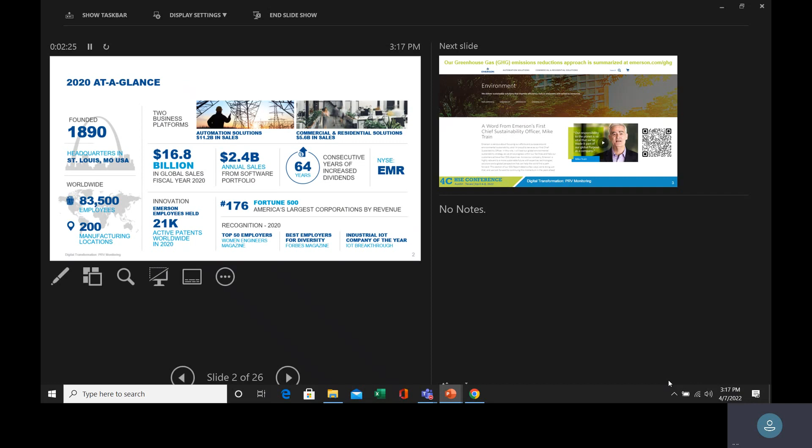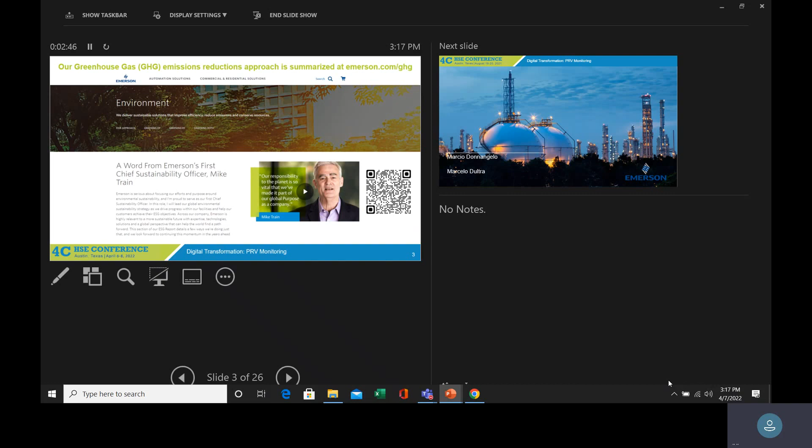And here's also our commitment to sustainability, top down at Emerson. So not just what we can offer to customers, but also what we do inside as well. Check our website with our Sustainability Officer for details on our initiatives.

Okay, so let's talk about the PRV monitoring. We presented this material yesterday. We're going to be a little more specific today on the monitoring part, but I just want to talk about this slide briefly about the affirmative defense.

So basically, when we have an incident, we need to discuss with the regulator how we're going to position our claim. What should I include in my claim or not? What we're seeing here is a copy of the administrative code from Texas - we took Texas just as an example. But when can you invoke the affirmative defense?

So when you have equipment breakdowns that for some reason are so old or obsolete technology, and you don't have the replacement parts, you can claim or use the strategy of affirmative defense - that you could not make a correction because you had parts or equipment that was not available, so it was beyond your control to do that repair.

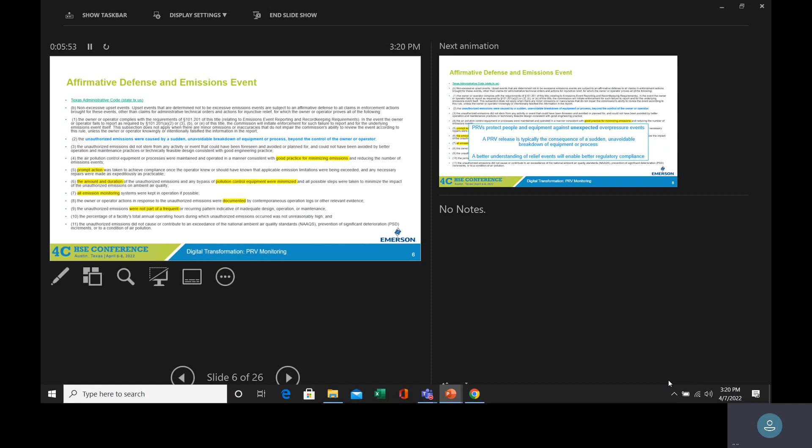So what we're going to cover here is an important portion of that - the PRV. Because if you do your homework with the PRV, you're going to be able to check, mark, and address all of those things, and not make that something going against you when you're claiming the affirmative defense as your strategy to minimize that discussion with the regulator. All right, so with that, I'll let Marcelo continue.

Thank you, Marcio. So I guess the point is, what's the connection between PRV and affirmative defense? And I think the connection is: first, if a PRV goes off, it opens - it's not a problem with the PRV, it's actually a process issue. It's a symptom that your process is overpressure. PRVs are not supposed to open, they're actually designed to stay closed all the time. If they're open, you should investigate - there is a problem there. So by definition it's an unexpected event.

So it clearly checks the box - it's unavoidable, it's an unexpected event, it's beyond control. Something happened there. And what we're trying to say in this presentation is using digital transformation - there's existing technology that you can use today, implement, that you can really build a strong case.

Okay, I know the PRV is not supposed to open, but I'm monitoring when it happens. So it's not the case that the valve opens and stays open and people don't see it, or the valve is leaking and you don't know the valve is leaking. I can monitor that, and you can build a case. There are other things we're going to show around this - it's using existing technology and the benefit of digital transformation to build a stronger case for affirmative defense.

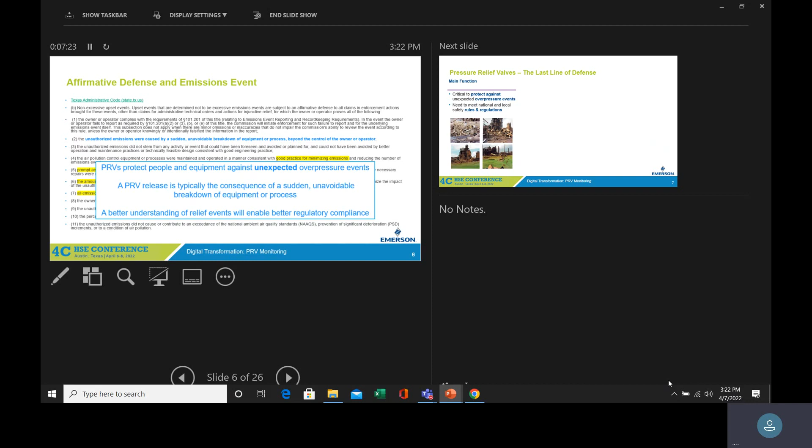That's the context. So going back to PRV 101 school, for those not familiar - they are designed with the purpose, we call it the last line of defense. So when everything fails, if your control system fails, your BPCS, your emergency shutdown system fails, the PRV is going to work. It's going to shut down, you're going to release, you're going to protect against explosion, protect people, equipment. That's the definition of how a PRV should work.

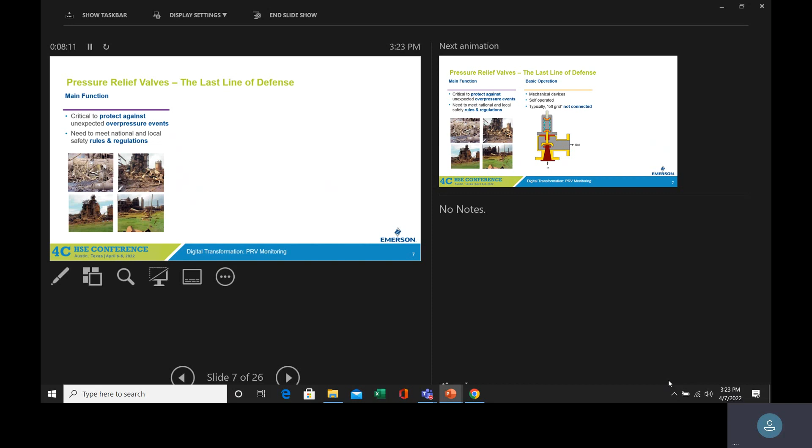And they are designed following a lot of codes and legislation - local, county - and there are insurance companies that play a part too. So it's a safety device. If everything fails, this stuff needs to work. And by definition, it's very highly regulated. It's super simple - you know what a pressure cooker is? That's it, you know the stuff that goes off - that's a pressure relief valve. And the compromise is safety against what?

Waste. When you release, you're throwing things out - energy that you do not need, just throwing it out. Product that you're throwing out, product energy and efficiency, when you open a pressure relief valve, you're compromising. Keep that in mind.

That's very important, and it's a simple device, super simple. So if the force resulting from the overpressure in your system is bigger than the spring force that's been keeping this closed, this thing is going to go up and release. It's a very simple device, designed to be simple because it has to be reliable, and it's not connected to anything. It's mechanical, purely mechanical.

So it's designed to be there, and normally you will never pay attention to that until you have a problem. The assumption is, it's there, it's not doing anything, so I don't need to mess with that. And people are actually afraid of going close to it, right?

That's the reality. And another interesting point is, this is a device that's supposed to never work. If your process is working well, they shouldn't open, right? By definition. So if they're never going to work, you don't have any way to diagnose it because they're not connected to anything. How do you know it's going to work when you need it to?

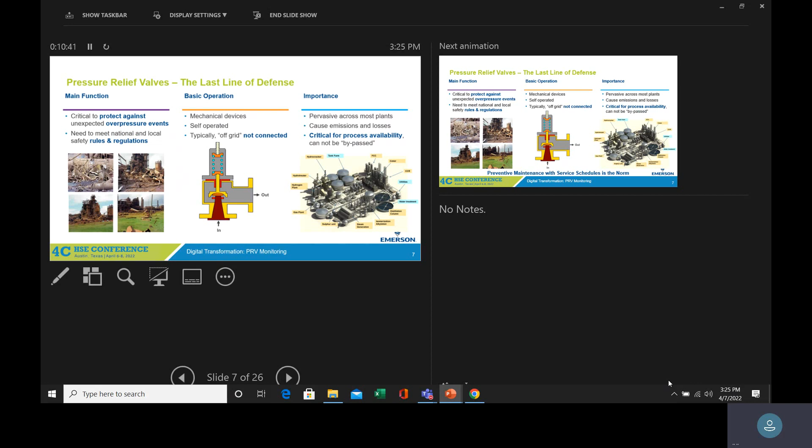Preventive maintenance, we do every 2, 3, 4, 5, 6 years. We have an interval that we test the valve. And that is by definition disruptive, because you have to remove a valve. You cannot really run your process without a pressure relief valve. It's critical for your process availability - there's a lot of implications. So you use preventive maintenance at pre-scheduled intervals to keep the safety requirements of your process, because the valve will work. But there is a compromise that you have to shut down your process.

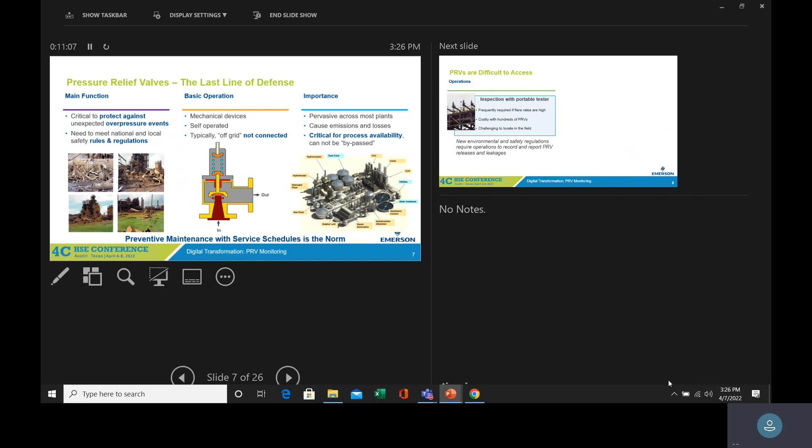Another interesting point about pressure relief valves - they're the most difficult valves to access. They're on top of everything. So people talk about, let's do a walk down. Don't do walk downs with PRVs. You climb everywhere. It's a very labor-intensive risk assessment.

And the challenge we have today - new regulations for safety and environmental are requiring you to check if the valves are operating properly, if they are leaking or open. How are you going to do that? You have to go there, climb with a sniffer or check by sound or whatever, and see if the valve is leaking or not. Some people even put their hands on the discharge pipe to see if it's hot or cold - oh, that's a lot, the valve is leaking. So it's very, very challenging and risky too.

Personal safety. And more requirements to do that.

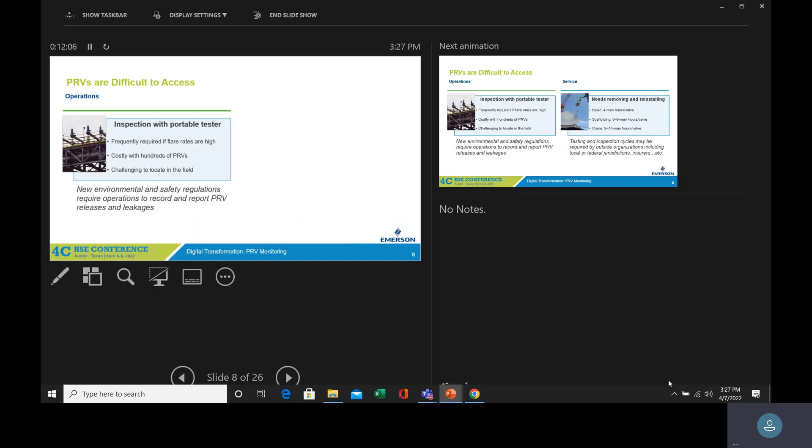Another challenge is if you need to do a check or test on the valve, you have to remove it. We did a study - it takes 4 man-hours per valve to remove and reinstall. And that's not counting any time spent doing the real test at the shop, just to remove the valve. That's the average for chemical, petrochemical, and refining companies.

If you need scaffolding or a crane, that multiplies by 2, 3, or 4. And if you're in the middle of a turnaround or a shutdown, you have to get a crane, ask a crew to go there, get permits, and it really disrupts the entire thing.

The bottom line is, if you could understand and have a way to reduce the frequency and use more intelligence in the way you do maintenance on those valves, you'll be better served. You could definitely improve efficiency, reduce costs, and improve safety at the same time. That's kind of the core of the value proposition for monitoring and using digital technology on PRVs.

There's a little more - we actually did a study with 10,000 service records on the pre-test. Pre-test is a common exercise on PRVs. So if you have a valve in the field, on one of those 2, 3, or 5 year intervals, you bring the valve from the field, put it on the bench test, and do the pre-test. In the pre-test, you apply the pressure that the valve is supposed to open at - let's say it's 100 psi, you apply 100 psi to the valve, and you see if the valve pops, to guarantee it will open at 100 psi.

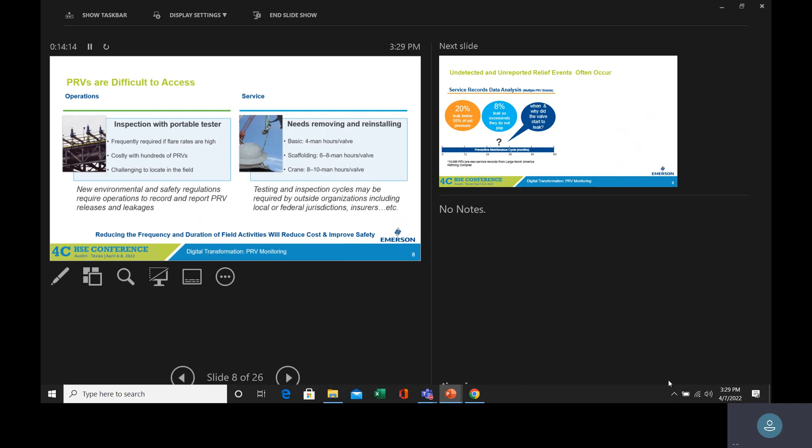The data we got is pretty alarming. This is a top quartile refining petrochemical complex in North America, one of the best running in the world. And the data we have is 20% of those valves will be leaking in this pre-test. When you bring the valve from the field, as is, it will be leaking before you reach 50% of set pressure. So if the valve is 100 psi, you apply 50 psi, the valve is leaking. The majority of the valves are installed above 50%. You want to go as close as possible to operate above 50% of set pressure.

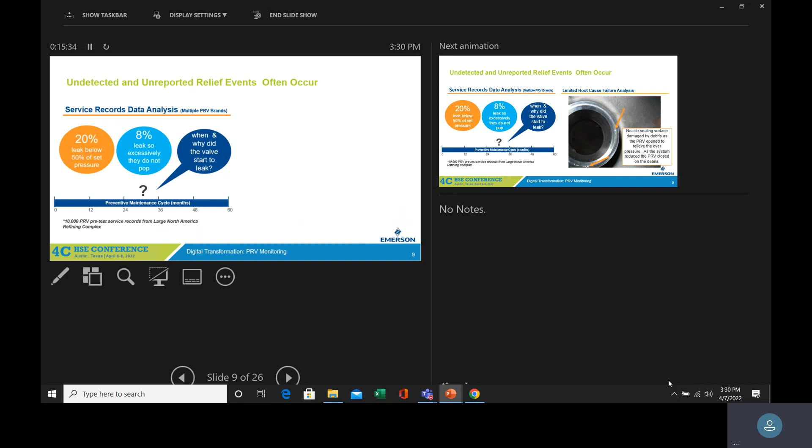This suggests that there is a large population of valves in the field leaking, processing all the time for 2, 3, 4, 5, 6 years. The question is, when did it start to leak, and why? There's no way to know because they are not connected to anything, unless you monitor. And if you're lucky, when you open the valve after it's leaking, you may see a scratch like this that suggests the valve popped in the field because it was an overpressure event. That's not supposed to happen. But nobody recorded it, nobody saw anything. But it did happen, and it reclosed, and the valve scratched, and the valve is leaking.

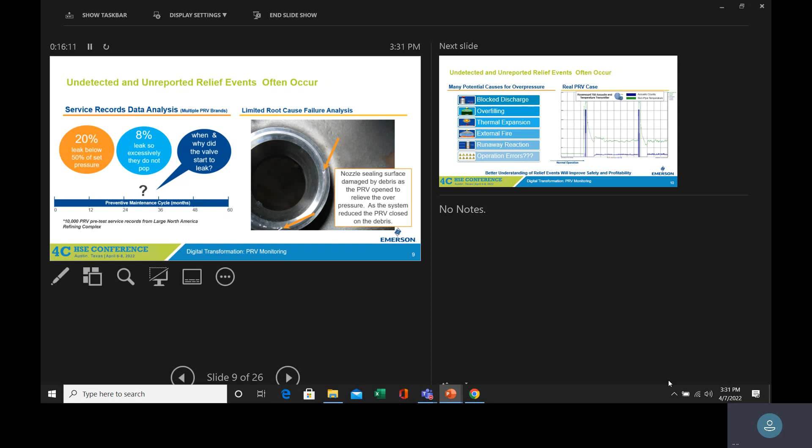When you size a pressure relief valve, we know why the valve opens. There are a series of scenarios that you go through to size how much capacity you need to keep your system safe. Some of those scenarios are block discharge, overfilling, thermal expansion, and so on. There is one though that we cannot control, we cannot size for: operation changes.

I have talked to operators, I have seen this happen. What happens from shift to shift is an operator may say, this valve is set for 100 psi, but I can operate it at 90 psi, that's no problem, that's 90%, that's okay.

No, there's a problem there. What's the number, Marcel? It's, I think, 0.1% leakage in a valve equates to a valve open for 6 hours in a year. If you have a valve with 0.1% leakage, it's a very thin leakage, right, for 1 year, of course you don't know. That's the same volume as a valve fully open for 6 hours. Can you imagine if it's fully open for 6 hours, how much product you're going to throw to the atmosphere? So it's a lot of volume there, because those are high pressure devices.

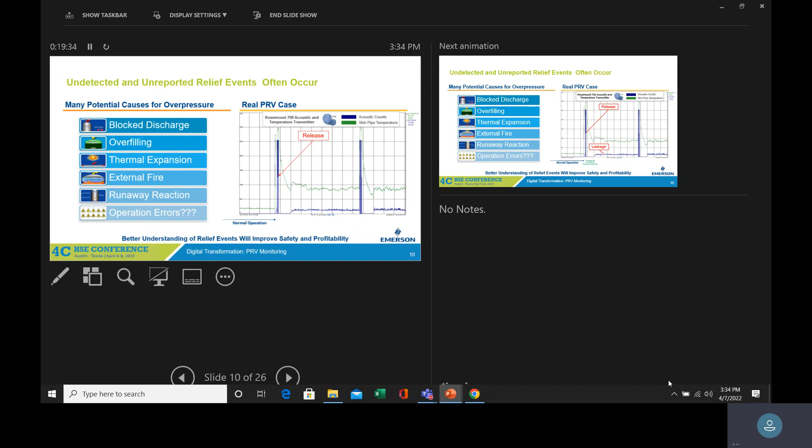Here's the temperature. The blue line is 0, which means the valve was closed. Then you have a relief event, the valve opens, the temperature rises at the same time, which confirms that the valve was open. Then the valve recloses, but look what happened afterwards: the temperature did not return to the same level, and there was a bias. They had another relief event afterwards, and the customer was oblivious, he didn't even know that they had a relief event. It was the graphic that showed it. That's what happened: the valve had a release event, and then started to leak, and that's it.

Well, let me just do a short comment here. That was interesting in this case. Just a little.

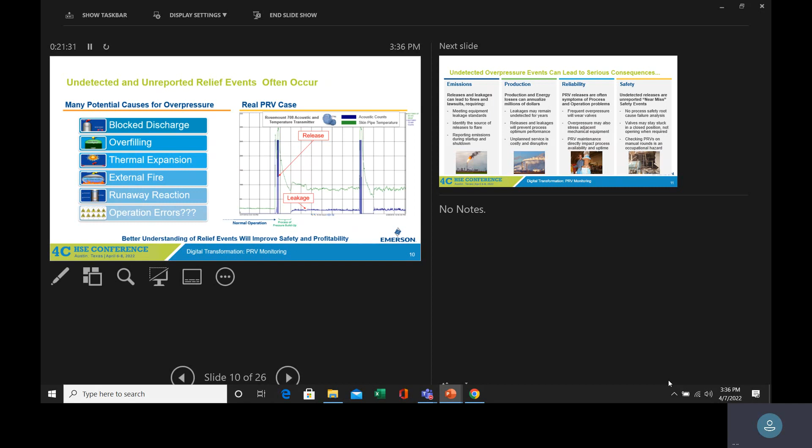So yeah, this is a real case. And there are others that we've accumulated over the years. And what are the implications?

Well, it's one of the few applications that touches a lot of KPIs. It touches emissions by definition. As I said, it's a compromise between safety and release, emission, energy, everything going off, right? It either goes to a flare, which is not good, or to a recovery system, or to the atmosphere. That's bad.

Another one is production, it's energy you're throwing out. Another one is reliability. If you're overpressurizing your system, you are definitely wearing your system more than it should mechanically, and not just the PRV. The PRV is going to be damaged because it's not designed to be opening and closing all the time.

So we're going to have a shorter lifetime for this device, but other devices in your system probably will wear and tear more. And safety too, because in those examples when the valve opens and closes and it's okay, yeah, it's going to be leaking bad, but at least the valve is operational.

But there are scenarios when the valve opens, and there are non-stable scenarios where you can have a valve fail on the bad point, which is the valve not opening on demand, and you don't even know you have that. You have a PRV valve that may not be operational, and you do not know, and that is not good.

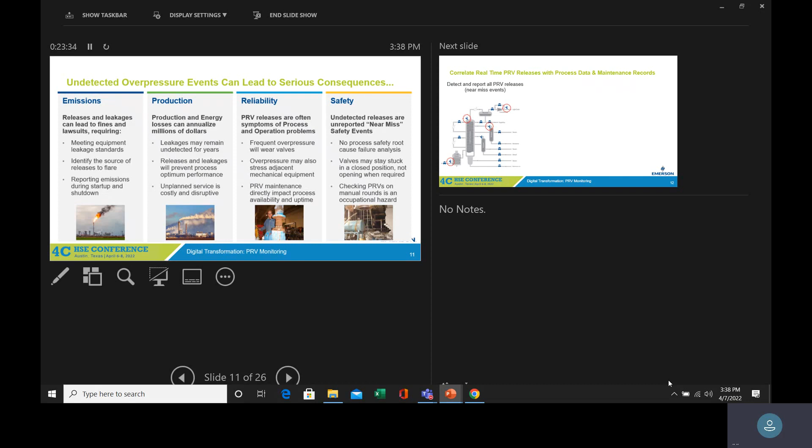So it's not a good point to have a pressure relief valve leaking all the time or opening and closing all the time. And the beauty of monitoring pressure relief valves is if you have an event at 2 a.m. last night, oh my pressure relief valve opened at 2 a.m. last night, wait a second, I can see that. What's the pressure in the vessel? I can correlate the pressure relief event with the pressure in that vessel, with the temperature, with the pH, whatever is around, to find the real causes for that valve to open.

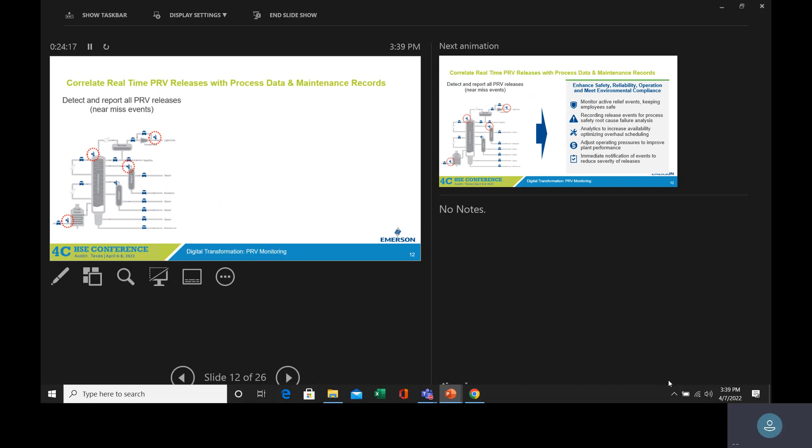Because the valve is the symptom of your problem. The problem you have is actually an overpressure event. It's a process problem, and you can troubleshoot your process. You can design a much more robust process.

You actually can make money from a better process, because we have documented cases where operators made an investment, an environmental investment, and made more than $1 million in operations production because you can understand your process better. And that's a different ballgame.

You can redesign your process based on this. You can map your problem. And let's not forget, a pressure relief...

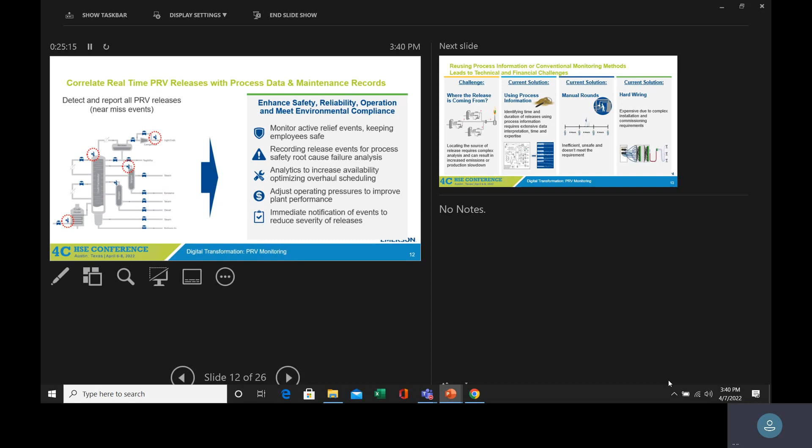...valve going off is a near miss safety event. Unfortunately, we're not recording that, but it is, because if that valve was not there, you'd have a problem, your vessel would cause a catastrophic event. So that is a safety part that is not well explored yet.

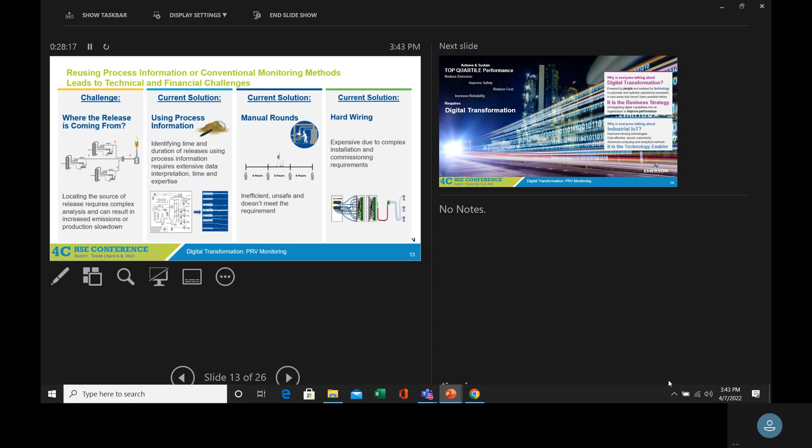And the last thing is wiring. Think about it, cost per foot is about $100 installation cost per foot. Imagine all those PRVs in weird locations, top of a vessel, etc. So the investment in wiring is just out of the charge to justify those kinds of products. So that's where we came up with the challenge in our engineering group and said, well, we needed a solution for this problem, right? And here's the chart.

This little piece of pipe is heavily regulated. Okay, so you cannot have penetration, you cannot change the dimension. There are some complications here. So the way to go here is using something that's non-intrusive, something that we just need to strap onto the pipe. And the answer to all those questions came through using an acoustic transmitter.

So when we say acoustic transmitter, it's not something like a microphone - this is wave propagation, mechanical wave propagation in the pipe. So loudness in the surrounding environment doesn't mean anything. You're not able to use this as a microphone, right? This works in a low ultrasound frequency. Okay, so that's the idea.

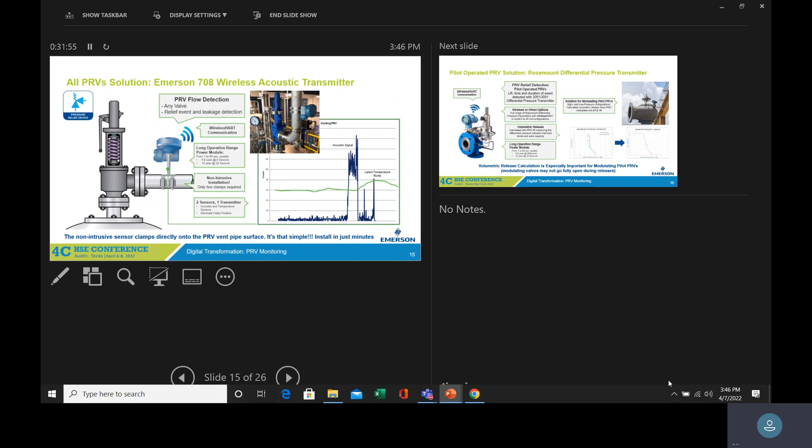So for that point, the recommendation now is to upgrade that PRV, not the spring load, but use the pilot operated PRV. And the pilot operated PRV can come from, if it's Emerson pilot, can come from the factory with a transmitter that will tell you what flow is passing through.

So basically, we can quantify the flow passing through the pilot valve. It has the characteristic of being like a regulator, so it doesn't pop 100%. It can go just 10% and stay there for a minute, 10 minutes, forever, just enough flow. There's a big difference between having a valve report 10 minutes at 100% and 10 minutes at 10%. So some of our clients are buying this to put in their pressurized tanks because they can quantify the level better. And we have the area, we have the differential pressure, the lift, we can calculate it.

What's the metal that you use? You have nickel, you have stainless. Oh, everything. Stainless for the transmitters and the valve, everything. All the way. Okay.

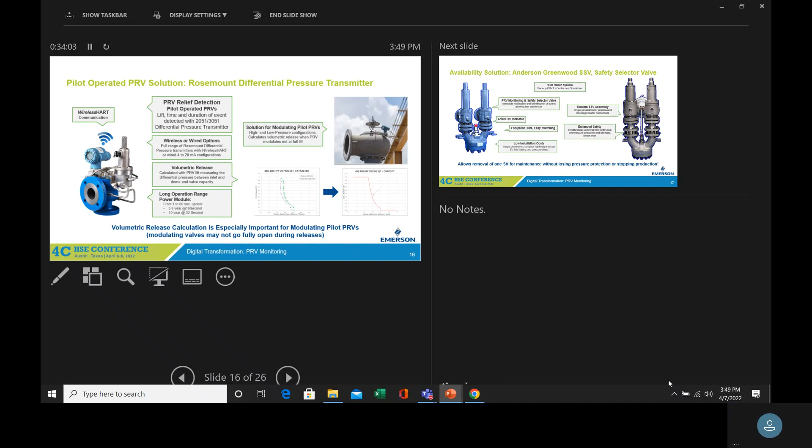Now, who does not know Steve Gross here in this audience? Anybody that does not know Steve Gross? Yeah, this is a popular guy. So we took Steve Gross for a tour at the plant facility that Marcelo works at, and he was absolutely surprised, amazed with all the technology that we have with the Crosby, Anderson, Greenwood, etc.

Then we showed some things, 'Steve, look at this thing here, this other product, it's not the PRV, right?' And everything, he was excited, just to put that in the back pocket, and he was really excited about this thing here that we call the safety selector. So Marcelo, tell me more about that, and why the function is simple, Steve thought it was crazy.

It's like if you have a valve, you put this device and you put two valves, one backup and the other. The point is, if you remove a PRV for maintenance, your process is down. Now, if you have a backup, you switch like this, and you can remove it for maintenance, or continue operating and plan your maintenance, but your operation is up and running.

What Steve foresaw was, wow, this is a great case for affirmative defense, because if I have an event and I'm monitoring and I see that the valve is leaking, I can document it because I'm monitoring, having that data, and I can go and switch the other valve, and I can tell the EPA, by the way, I took action. I had this unexpected event, there was this release, this leakage, and I went to the field and switched the other one. So it's kind of the best engineering practice.

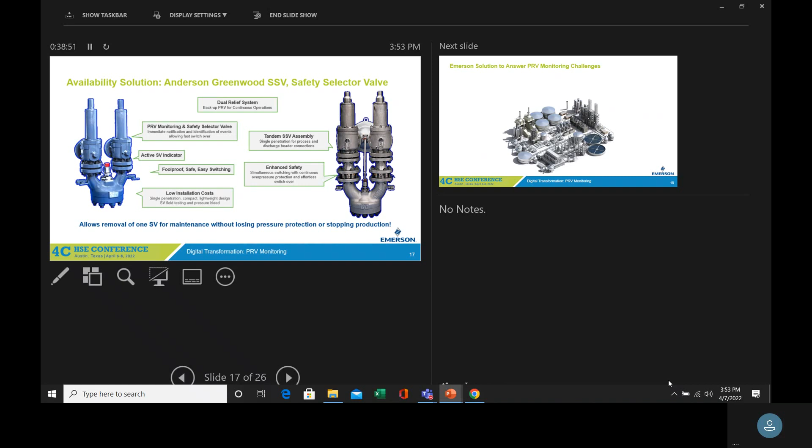When you say wireless, it's a very specific protocol called WirelessHART - this is an industrial protocol. When we're talking wireless, we're not talking cellular communication, we're not talking 5G. This is a very specific wireless technology, for a small package of information, highly protected, with multiple redundant paths. So there's a lot of halos around industrial wireless communication that differentiate it from our normal experience with access points and those kind of things.

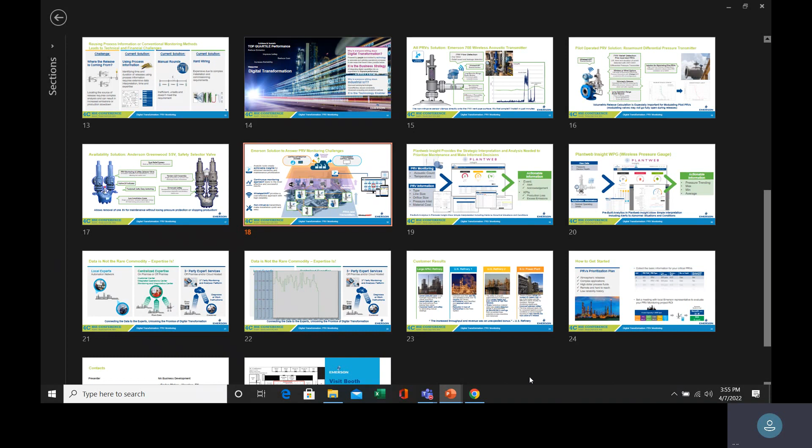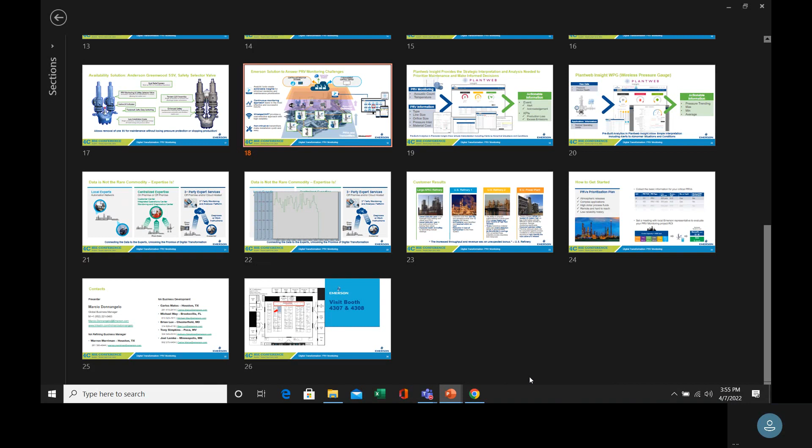Okay, so then the idea is having the PRVs all on the WirelessHART. So next, please.

So then this information from the PRV is going to reach our gateway, which again, it's very possible that you already have this gateway in your installation for some application. But these WirelessHART gateways are mix and match - you can use it for your PRV, but let's say somebody in reliability already installed these gateways because they're using them for pump monitoring, whatever. You just use the investment that you already have.

And then from here, traditionally, we send this information to the DCS. But now we're changing this, the way we're doing it, with an analytic software. So we have an analytic platform that's called Plantweb Insight.

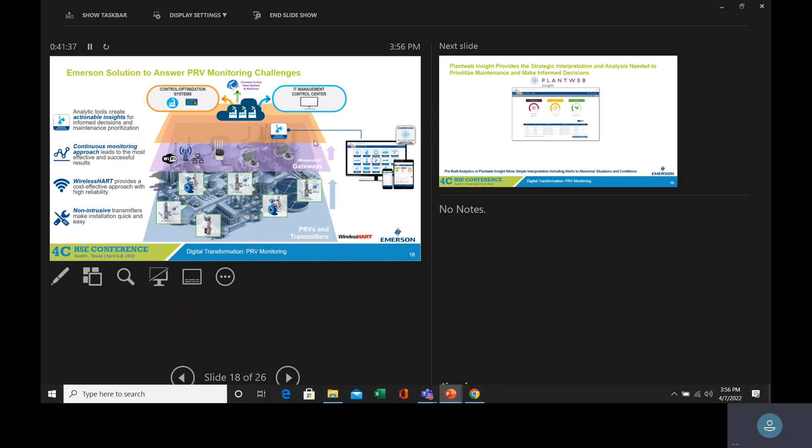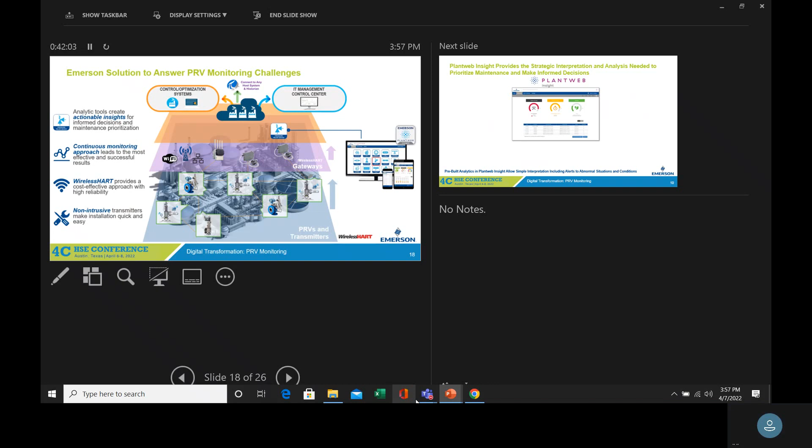We have this Plantweb Insight that's going to collect all this information from the PRV, and we have an app for PRV specifically. We're going to characterize all this information from the acoustic signal - we're going to make the distinction if there's a false positive or not positive, what's the natural vibration of the system, what is a real release, those kind of things. And we're going to produce data that will match what EPA is expecting.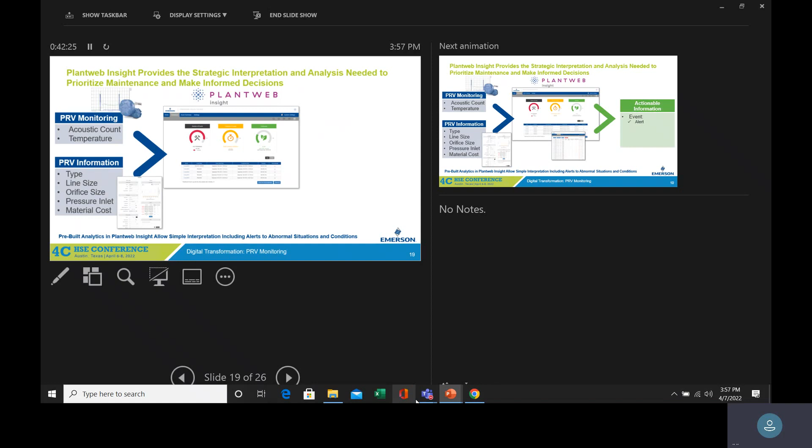So this is the typical screen, and then the alerts - alerts not just for environmental, but also for maintenance. So it's a system where we can make more departments happy with that. It's not just the same for everyone.

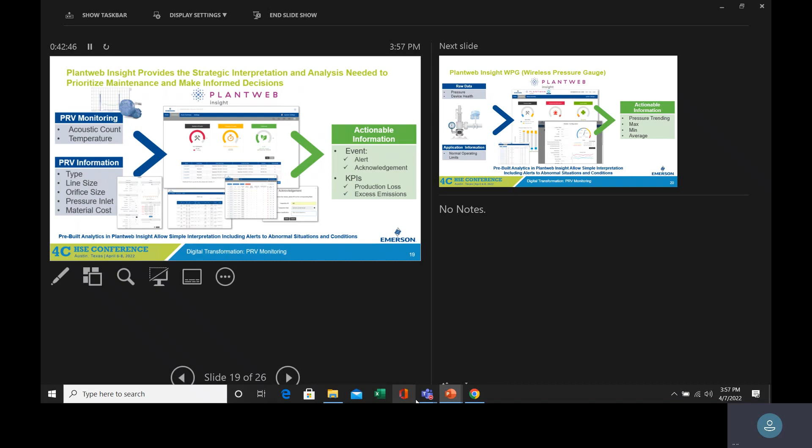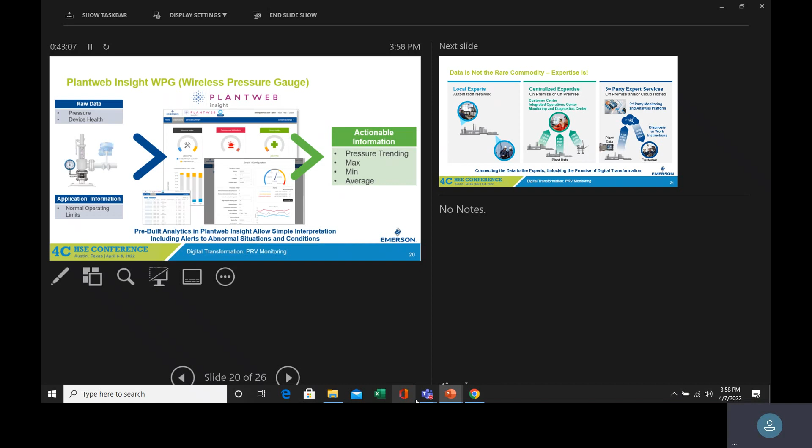Okay, let's go ahead, Marcelo. One last thing - rupture disk, that's another complementary technology that we needed to use with the PRV, especially in special chemicals. Again, we have a specific app to monitor the rupture disk and send all the alarms as well.

So no more wires. Let's go more into detail on how we avoid this. It could be a central station, could be a server, could even be a cloud if your corporation has one. So then across multiple sites, you can optimize the expertise - you have one expert covering 3, 4, 5 plants. With the system, you can share all the information across plants and then optimize your SMEs.

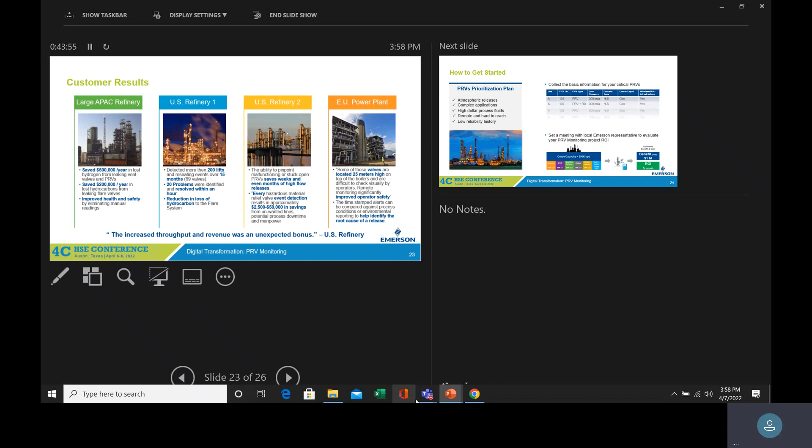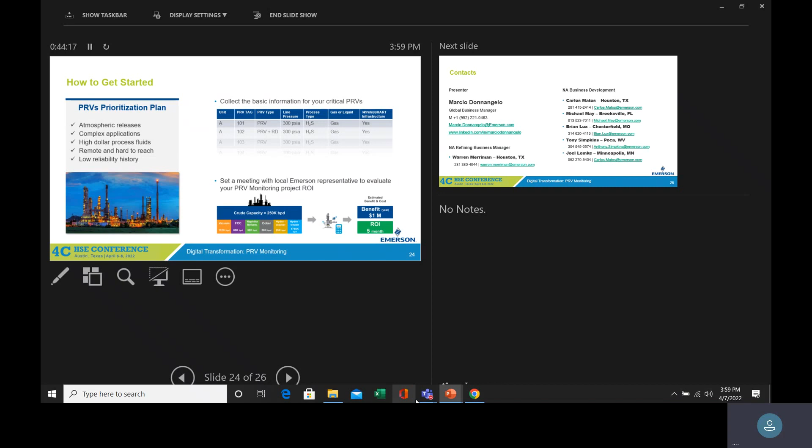Some examples - you're going to be able to access all this information on the website, then you can take a look. I think this is not the latest... it's working out. Yeah, that's it, so now we end up with our presentation.

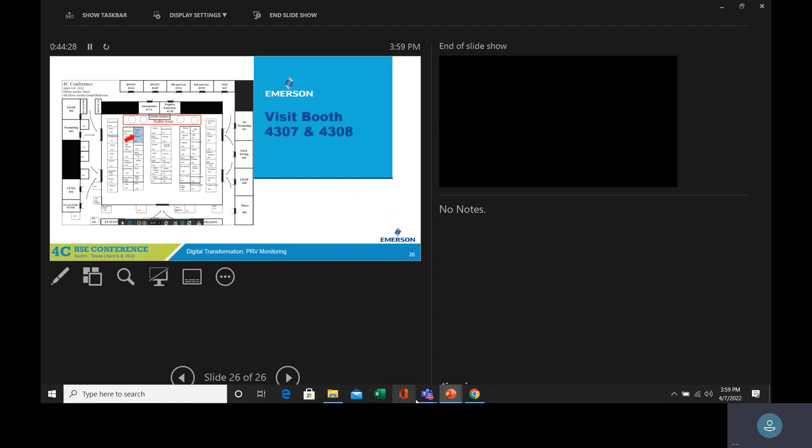Questions? The battery life - it can vary from say 3 years to 10 years.